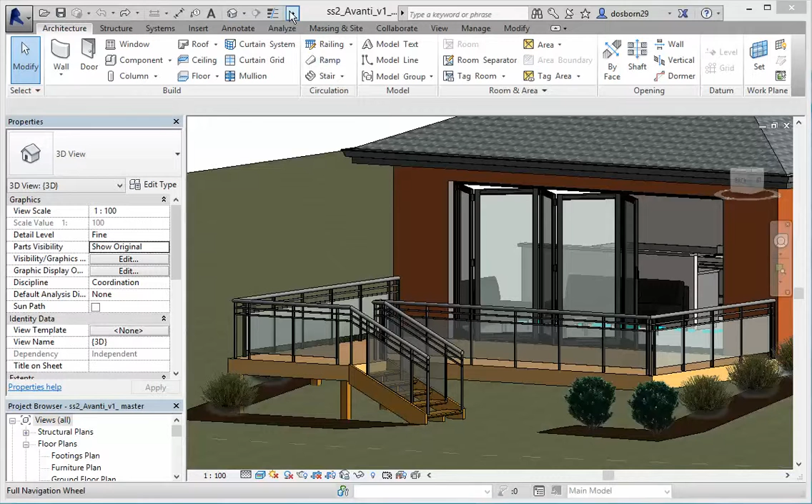And I'll just move this up a little bit. We'll come into our ground floor layout. We'll zoom in on that area that we're going to put the stairs in, which is this area here. Stairs, you'll find those up there. We just need to click on those, and there is only one type of stair in this particular template. You can have other stairs, of course. You can set up other stairs, but this one is a 7-inch maximum riser and 11-inch tread.

Now, that's the maximum. So it's 11-inch maximum where you put your foot down on the stairs, and maximum of 7-inch going up from one stair to the next. So it's in imperial measurements, but we could change that pretty easily by just changing the name of it in the template, but I've just left it like that. So we want that one. We come in and look at what our settings are. We want to do a few settings here.

We want it to come off at a base level of the bottom of the footing minus 450. We want the top level to be to ground floor, but I'm just going to set that down a little bit, and I'm just going to put it down minus 5 millimeters. And I think all the rest is pretty good. Oh, the desired number of steps we want in there is 6. And this is obviously just going to be a straight set of steps.

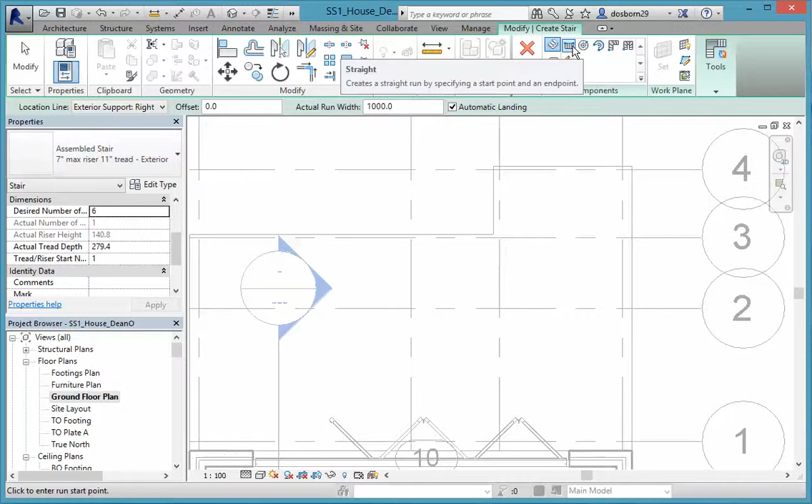If you want to do other types of steps, you'll need to go in and have a look in the online tutorials at either Lynda or YouTube. Okay, we get our same sort of modification tick cross setup that we have with our floors and so forth. And we just want a straight set of steps. Now, it's asking to pick the run start point. Now, they always start at the bottom of the steps and go up.

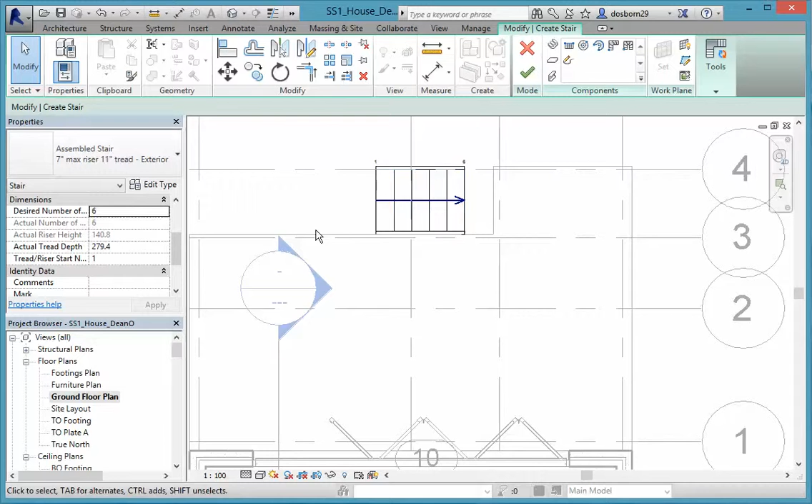So I'm not sure exactly where I want to start. At this end and going out this way, it's not going to work, so I have to start somewhere around here. So all I'm going to do is just come down on that edge there till I get that little cross, and I'm going to just click and drag in the direction that I want to go. Now you can see the stairs aren't attached there, but the stairs have gone in. Now it's just a matter of zooming in, and we can then highlight the stairs, click on our move button, and pick that corner and drag it up to that corner of the patio.

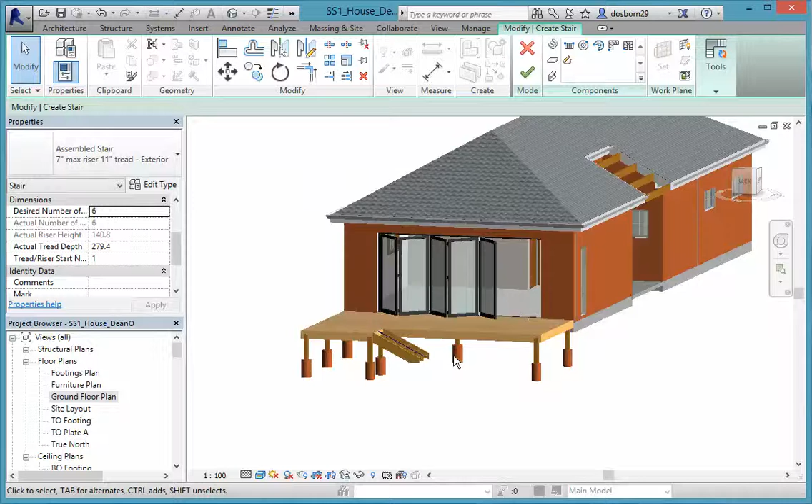And if we have a look at that now in 3D, we'll just spin this around, we can see our steps have gone into place. Obviously they're not in the ground at the moment because we haven't put any ground there for them to go into, but they're coming in there pretty well. So if we're happy with that, we can click on OK.

When we click OK, you'll notice they instantly get railing in there, and because we've only got one type of railing selected as part of this template, it's put that railing in, which is a steel railing with a glass wall around it, which is the one we're going to use.

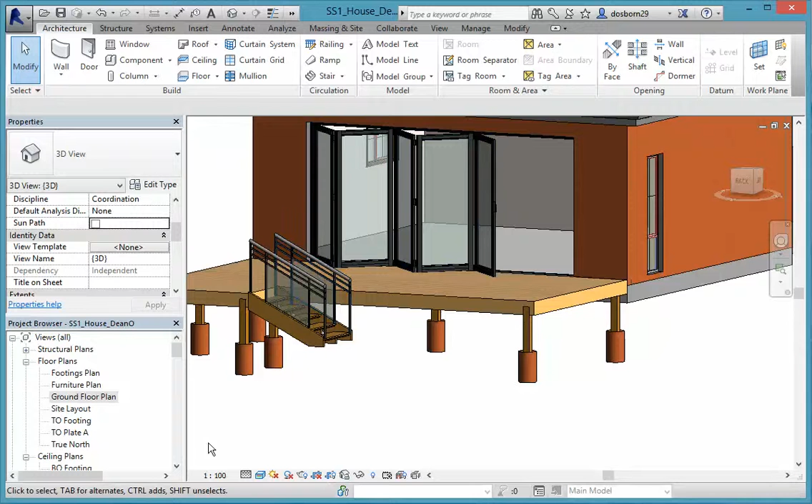So we're ready to now put a fence around the rest of the pergola in this same sort of railing, and we'll go back into the ground floor plan for that. If we have a look, you can see where that railing is - that's it there when we highlight it. You can see the railing when we're over it, and this is the end of it here. So we're going to go from the center of that, and go round on this side.

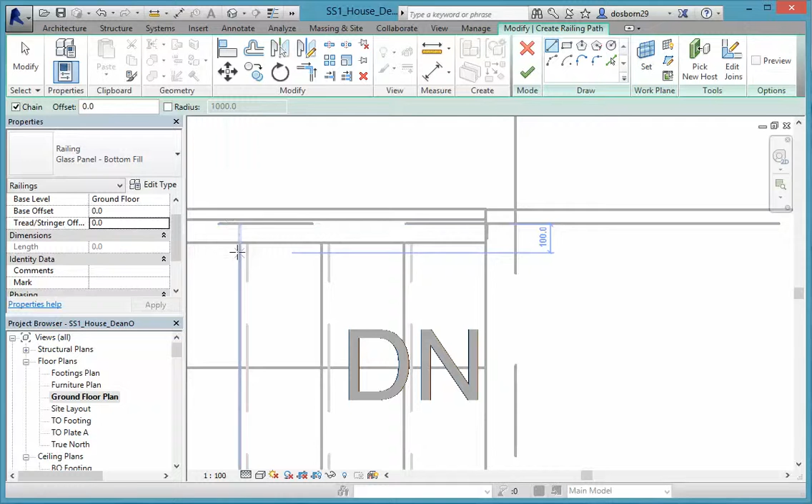We'll come back in, select railing. This is the railing that we want here. I don't think there's any others in there - that's right, that's the only one. We're not making any changes to that, we're just going to keep it at the same level. I'm going to zoom in and find that center point of the railing - it's the triangle, remember?

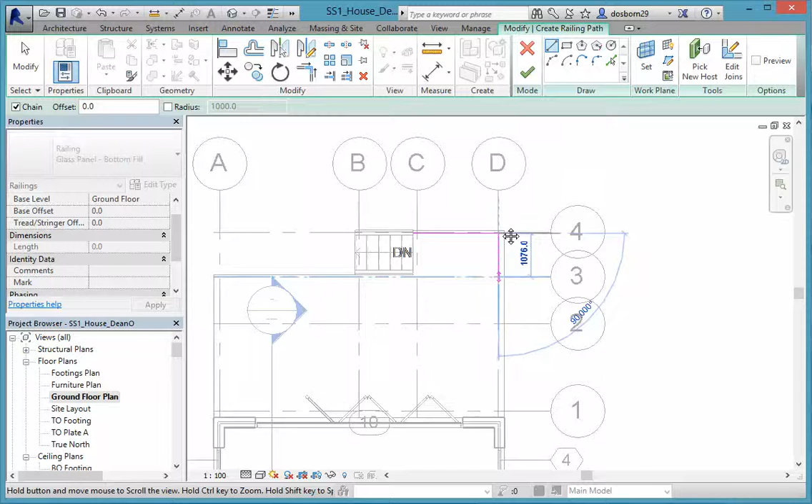Then I'm going to zoom back out, and come across, and actually line it up with this grid line here, and come down until I get to the edge of the building. Hit escape a couple of times, and if you think that's okay, give it a tick and let's have a look at that and see how we've gone.

Now the important thing is that this rail here has joined into that rail. What you can do is just edit path there and click on edit join, and preview, and then tick it again. Hopefully that has gone in.

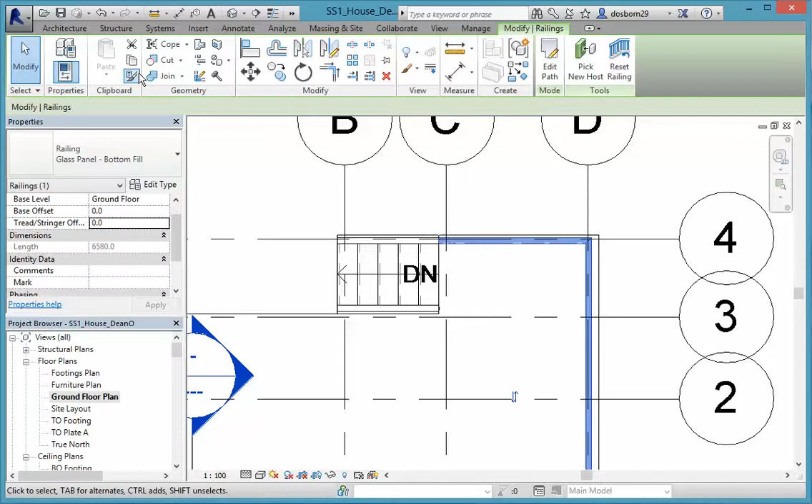Let's go back and have a look at our 3D and see what we're doing here. It's just a little bit down, it's not lining up really well there. Maybe we can actually bring that back up in this particular drawing - we might bring that back up to 0. Let's see what that looks like.

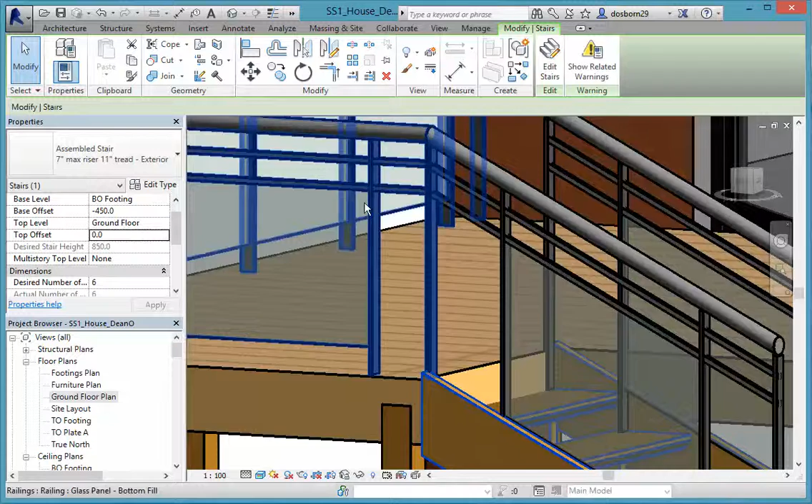Sometimes you just got to play around with these a little bit. Yeah, that's not too bad there. We can, if we click on this rail, edit path and edit join and OK it. Yeah, that's looking pretty good.

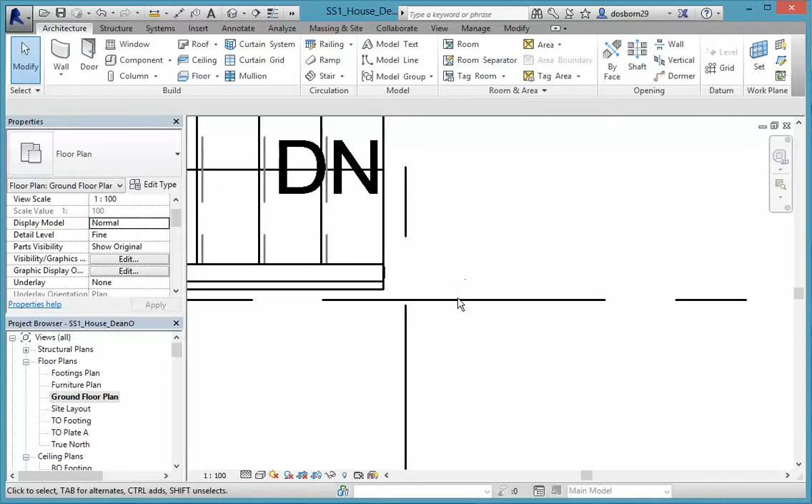Okay, if we go back to our ground floor to put in the rest of our patio railing. And for this one, we actually want to come out a little bit, come around, and then go down. So we probably won't travel right down the edge because it's a bit close there on that grid line. We'll come back over a little bit for that.

So again, railing, we've got our railing in there. I'm going to come in, find that center point - remember, that's where the triangle occurs. Come out, I think I'm going to come out about 300. Again, it's really up to you, and we don't have to be too fussy about this - we can move it around a little bit if we want to. I think I'll come down just a little bit there.

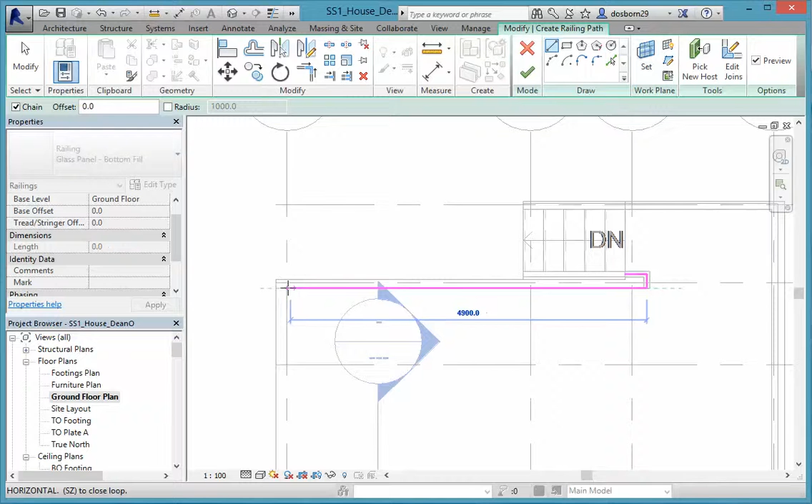Come across, pick up on that grid line, and go down to the wall. Hit escape a couple of times. If you're happy with that, just remember edit joins and OK.

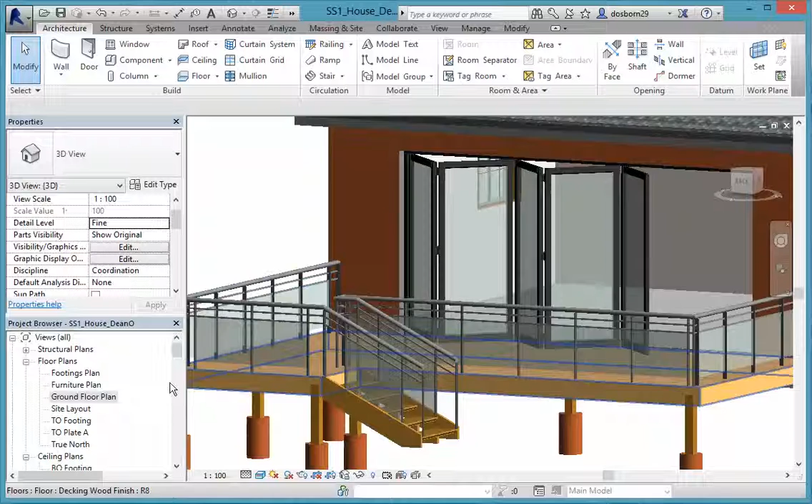Again, we'll go in and just see how that join has happened over there, and again, that one's pretty good as well. So you can see now that we have our railing all the way down - it's going into the walls over on the end here. That's pretty good, looks nice.

Pretty good - a little bit of a bunching of supports there, but I think that looks pretty good on the whole. So that's how we put our stairs and patio railing in. Move on to your next video.